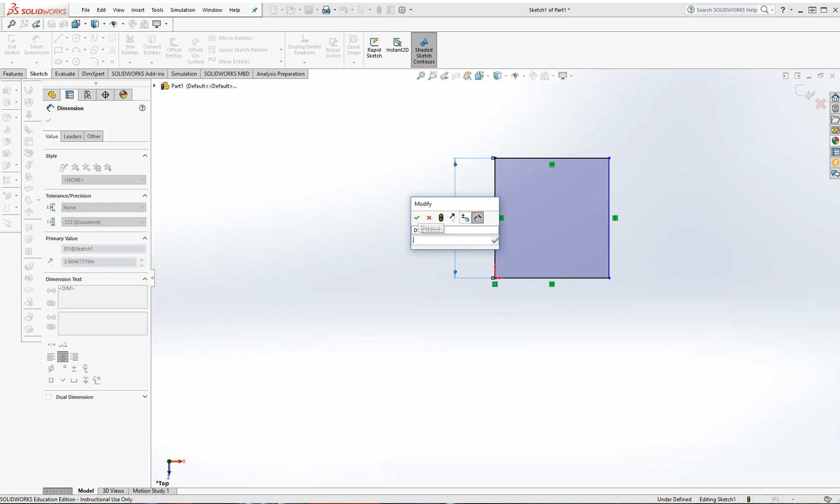And we know the simplest brick, which is a 1x1, is 0.31 by 0.31. If I go to my ISO view, and we also know that they are 0.128 thick.

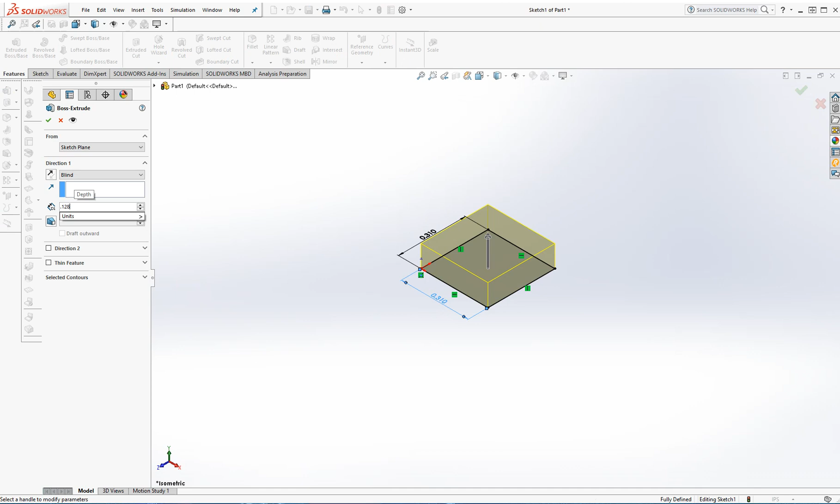This is for the thin Legos. So I go in features, extrude it, 0.128 in the downward direction. Happy check mark.

We'll do a quick save. Save as. I'm just going to throw it on the desktop, but you throw it wherever you want. Okay, so I'm going to call it Lego brick, and then your first and last initial.

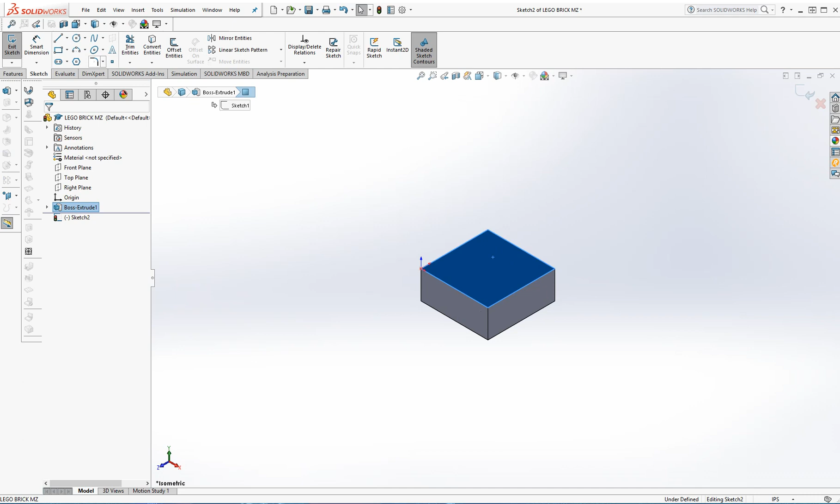Next thing, we need the round extrusion at the top. So we're going to click on that surface. We're going to sketch a circle. Doesn't really matter where, because we're going to dimension it anyways. And let's get to a top view.

And we know that it is 0.193 diameter. And we know that it's centered on a 0.31, so it's 0.31 divided by 2. And then in the other direction, 0.31 divided by 2.

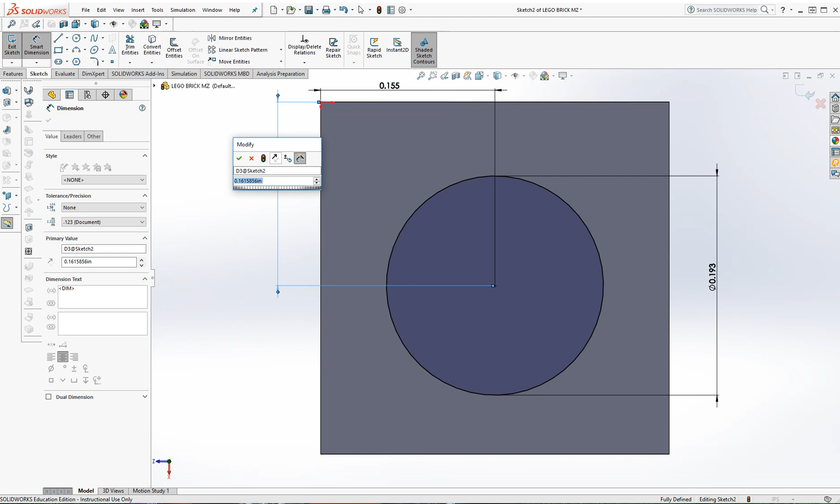Black is beautiful, it's defined. Let's go back to our ISO. And we know it extrudes up 0.084.

Save that. And then the next thing we need to worry about is that there is an undercut of all of these so they can go together.

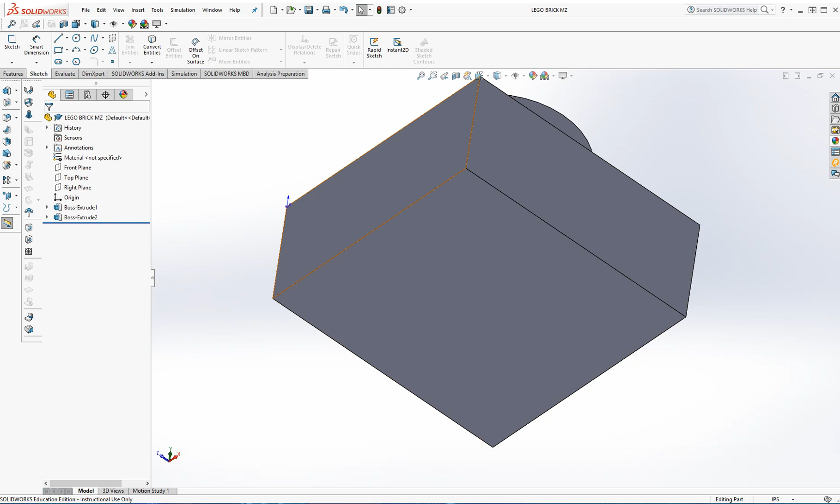So we'll click on that surface. We're going to sketch. We're going to do an offset of 0.06. And we're going to reverse it so it's on the inside. We're going to do an extruded cut.

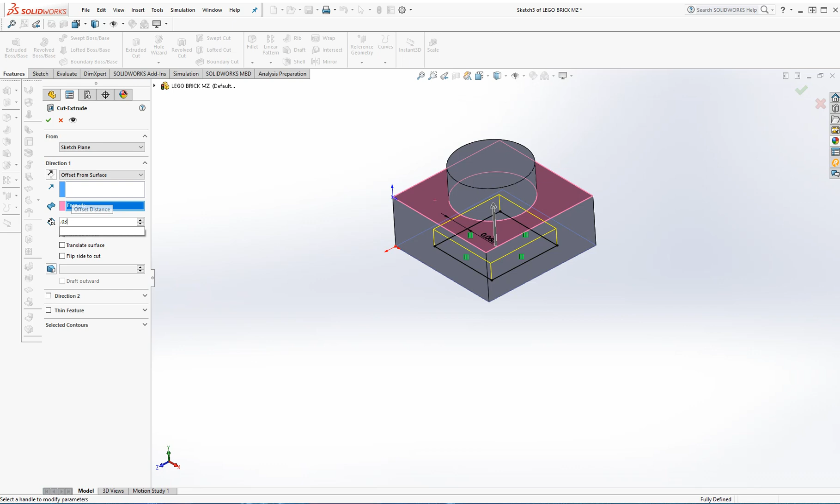We're going to do offset from a surface. So we're going to grab the top surface. And we know that it's offset by 0.038. Okay, save again.

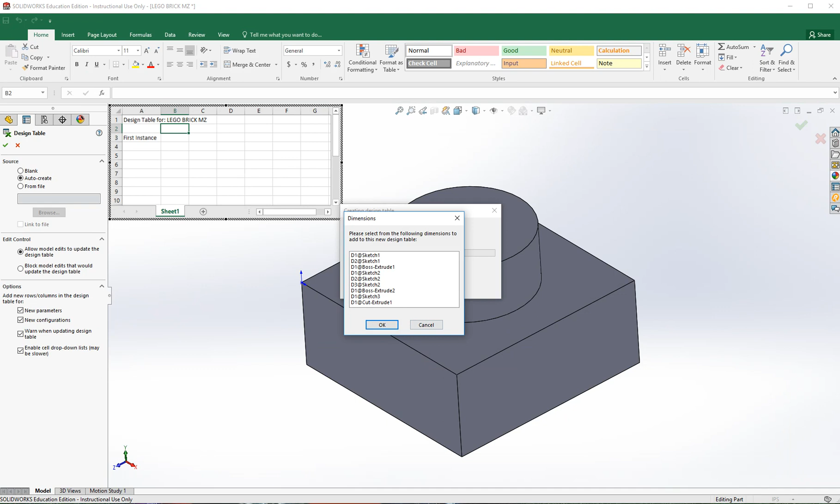Now we have to start getting into configurations. So we're going to go into Insert, Tables, Design Table. Let it stay on Automatic or Auto Create. Happy check mark, it'll do some stuff. It'll tell you it's seen all these different parameters you've already created, and that we're good to go.

With design tables, you see the sort of hash or section view kind of lines on the perimeter. Those are the only way you can grab it and move it around. If you click in the open space of the drawing, it's not going to work.

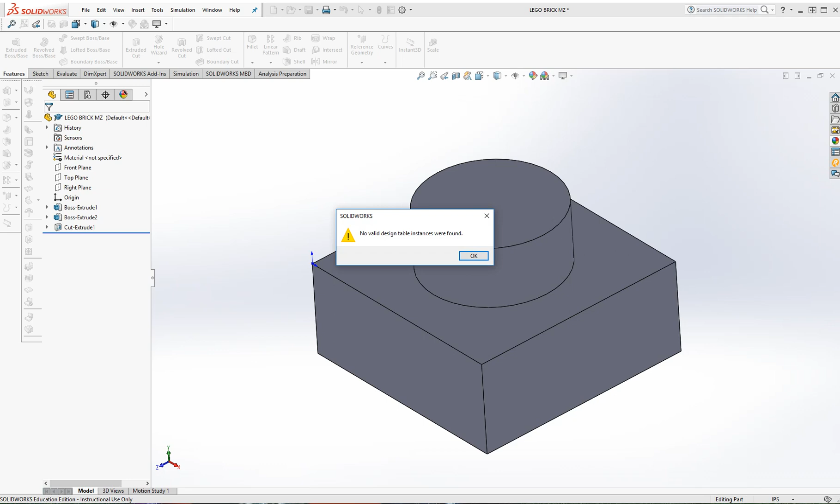But what happens if you click? Well, let's click it. Oh, and it disappears. You don't want it to do that. And it also tells you there's no design tables found because you haven't created anything yet.

Sometimes design tables are a little glitchy, so you may want to go in and turn on Excel. When you're in Excel, just grab a blank workbook and minimize it, as long as it's running. Sometimes it helps the glitchy factor because SolidWorks and Excel are integrated together, so you can use it as a design table.

So if I go up here, configurations, you can see the tables. If I expand that design table, I can edit the table.

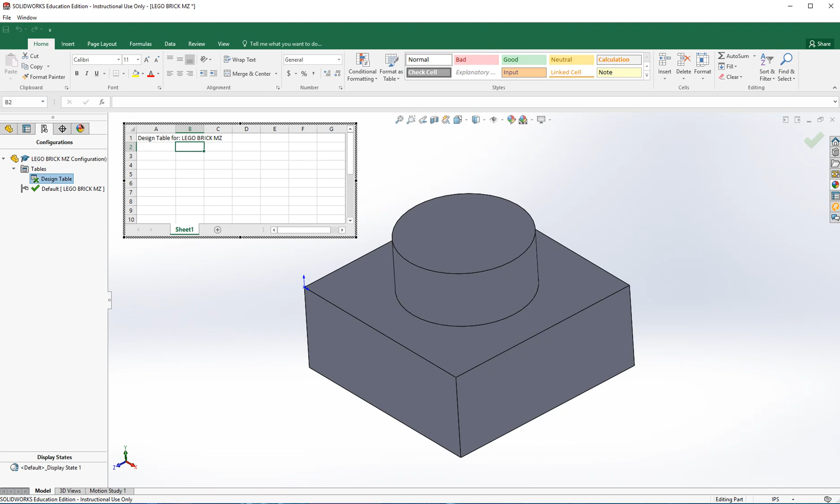All right, it goes automatically to B2, right? And if I go back into my design tree, and I double click the first boss, right? It's going to say state of boss extrude 1, which is the square, is unsuppressed, which means it's always going to be displayed.

All right, you're also going to want to know in that boss extrude, and you got to grab this carefully again and drag it, its width and also its thickness. So we're going to do boss extrude, and over here you can see the thickness came up in blue, so it's going to fill in here. So I double click it. Okay, it's there. Sometimes that comes up, just hit the happy check mark.

And then you're going to want your width and length, or width and length, depends on which way you look at it. So again, you're in D2 now, double click that, and then double click the next one. You see they automatically fill in. And we're going to call this over here, we're going to go 1 by 1, and we're going to call it flat.

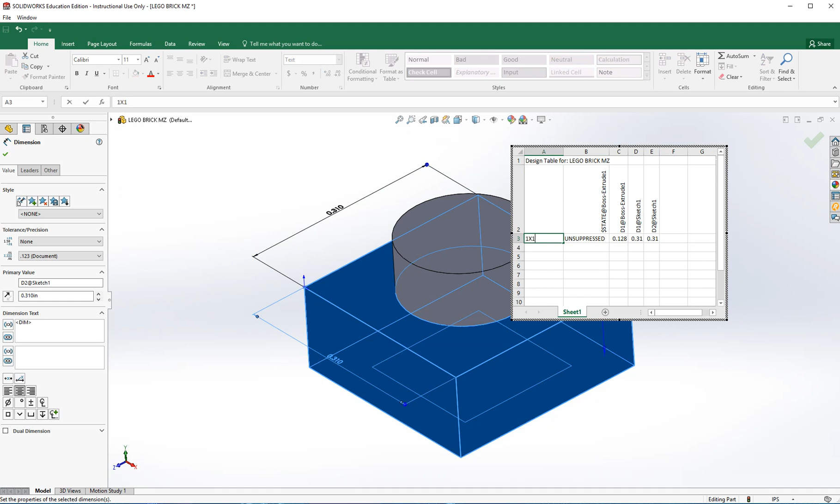And now I'm just going to click off. Okay, it's going to say that it has created a something. All right, doesn't hurt to save it right now.

Go back to configurations, you can see there's a grayed out 1 by 1 flat. Let's double click it, now it's active. Design table, edit the table. Okay, it's going to say some new things came up, like the part number. Okay.

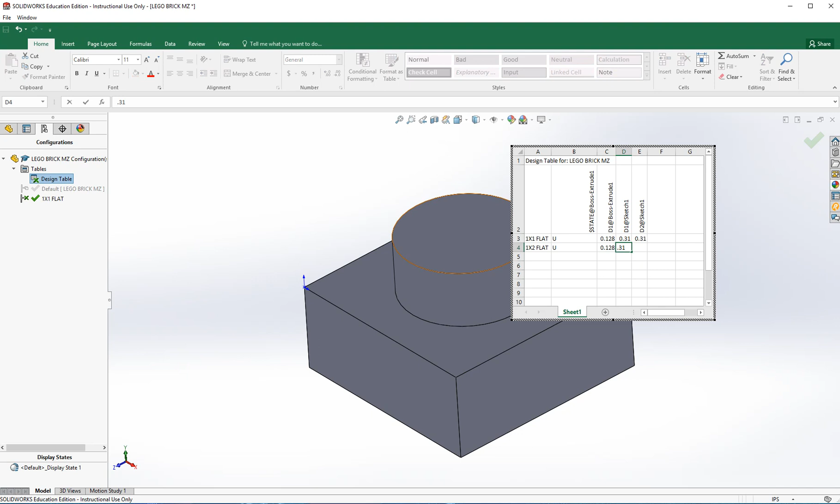And now we're going to do a 1 by 2 flat. So 1 by 2 flat. The extrude is still going to be unsuppressed, your initial boss. Okay, its depth is going to be 0.128. Okay, its direction, well in one direction it's staying the same because it's a 1 by 2. In the other direction it's doubling, it's going to become a 0.62. And if I click off over here, it's going to say a 1 by 2 was created. Quick save, and if I double click on the 1 by 2, you can see it's gone in a direction.

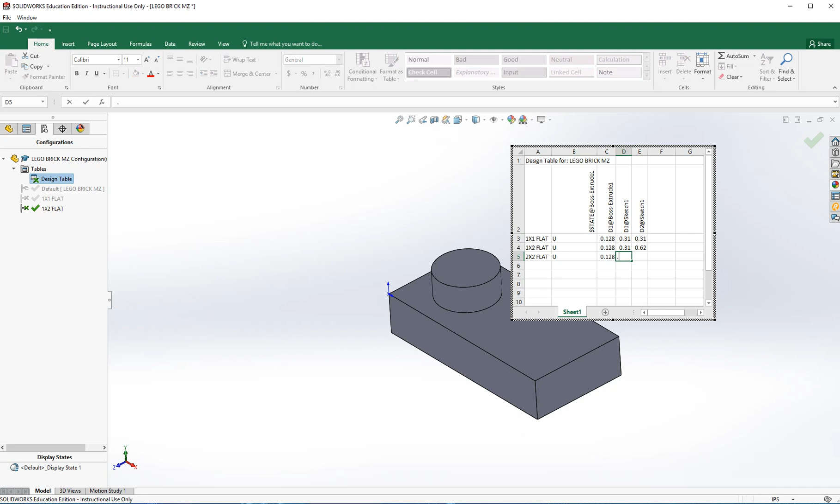Now we need to do a 2 by 2. So we're going to go back in, edit the table, and we're going to go, or a 2 by 2 flat. Okay, again, the boss is unsuppressed because we need it. The thickness has not changed. Okay, but now we know it's 0.62 by 0.62. Click off, it's going to say a 2 by 2 is created. You're going to see it here in your configuration. Quick save, if I double click on it, we've got that.

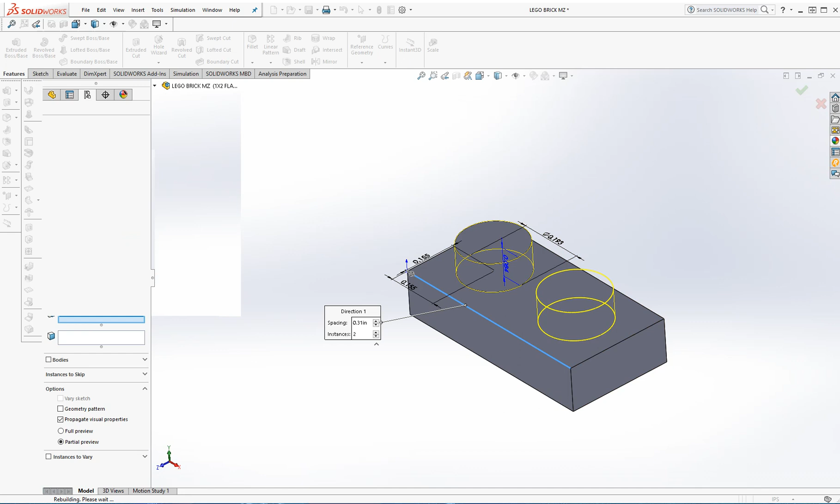So let's go back to the 1 by 2. Here we are, now we want to add some linear patterns. So it's going to say a direction, I'm going to grab this edge. Okay, it's going to ask a distance. Since every brick, starting by the simplest, is 0.31 by 0.31, its distance center to center on the post is 0.31. And then we go on to features, open our design tree, and that's the second one. It's previewed, okay, happy check mark. It's good, okay.

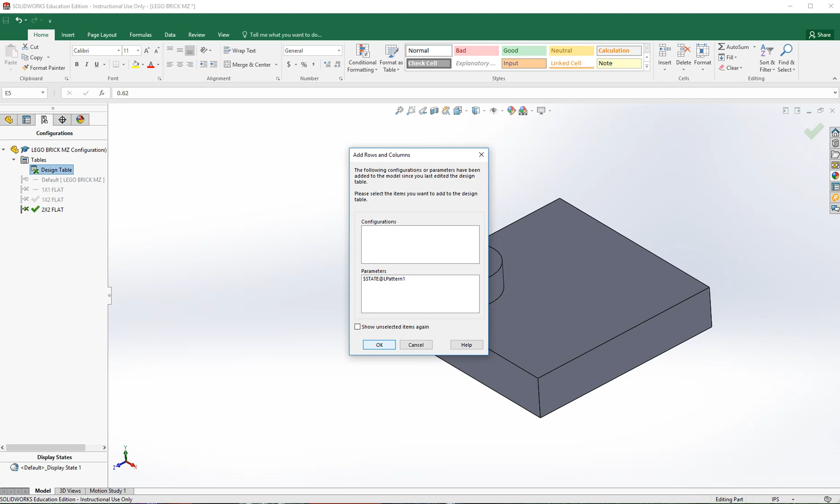Then we're going to double click on the 2 by 2. You see, it disappeared, why? Let's go into design tables, let's edit the table. Okay, it has patterns, either they're on or off. Okay, so we're going to have to use that. And here it is, comes up. So the first pattern we need to incorporate into our design table.

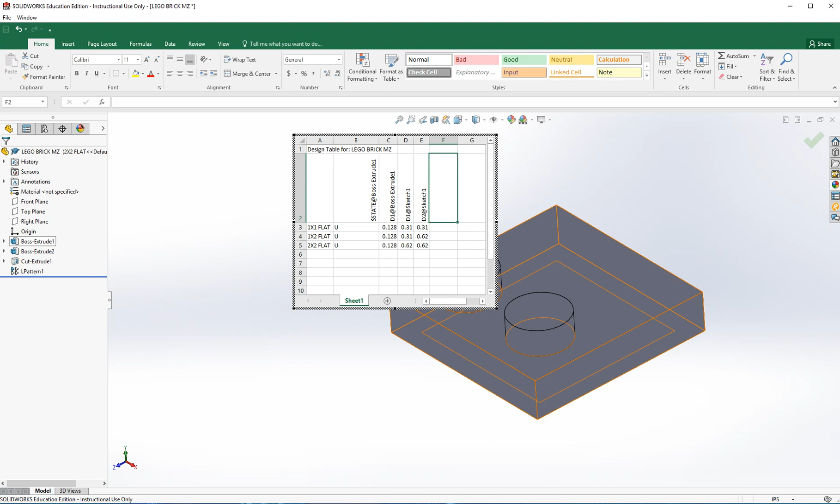So let's go back into here. Okay, and right now it's showing it as... so let's unsuppress it, so it shows the 2. And let's go back into the design table. And back into configuration, so pattern 1 just gives you this direction right now, or possibly the other direction. It depends which sketches you used. So F2, I double click pattern, it's going to say unsuppressed. Okay.

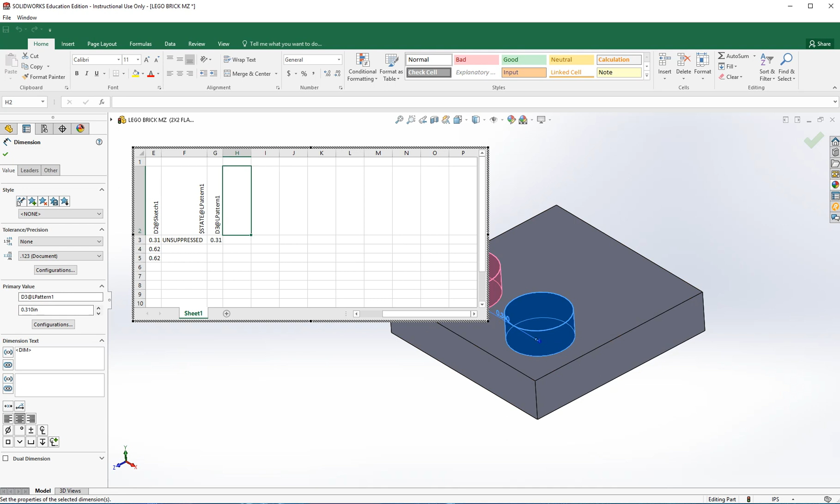And let's just drag this carefully again. And in here you're going to want the dimension, which is 0.31. You can see it comes up. And now you have to grab these corners very carefully, stretch this out, and use the bar at the bottom to move things over. Okay, there is no pattern in the 1x1, so you're going to suppress it.

In a 1x2, there is a pattern, okay, and its distance is 0.31. And we'll just click off. Well, let's just save this quick. And you can see it's a lot of back and forth to get this to work correctly, but you need to take it in slow steps until you get very comfortable with configurations. So if I go back to 1x2 to double check, it'll ask you to rebuild it. Don't worry about that, quick save.

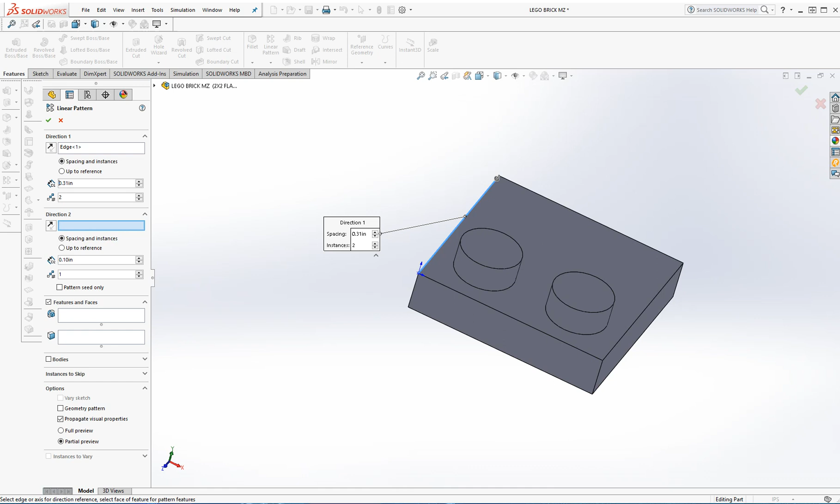1x1 looks good, rebuild again. 1x2 looks good, also that undercut you can see is there. Okay, and then let's go to 2x2. Nothing there yet, so we're going to go back into here. We're going to do another linear pattern. We'll grab this edge, it's going this way now. Still, whatever. And then what do you want to do? And we're going to grab that, not this direction, but the other direction. And a happy check mark, right?

And save that. Go back into my design table. Edit it. Okay, it's found that there's a pattern 2.

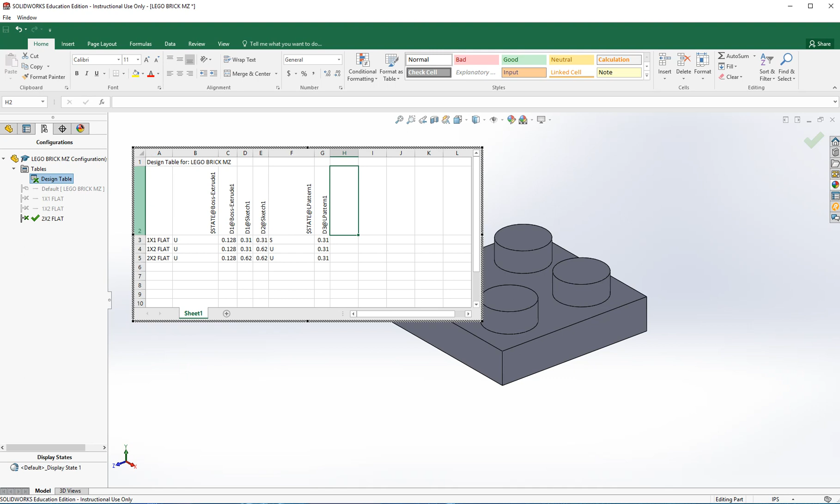And that's the pattern we're going to want. So we're clicked in there already. We're at H2. Go back here. We're going to double click the pattern. All right, and we need to know. I'm going to move this again carefully. Okay, we need that dimension. So we know the dimension we're going in.

And happy check mark. But it is suppressed in 1. It is suppressed in a 1x2. It is unsuppressed in a 2x2. Okay, these numbers, you can put them in there, the 0.31 and a 0.31 again. You can see that they do not change anything because of whether they're suppressed or not suppressed.

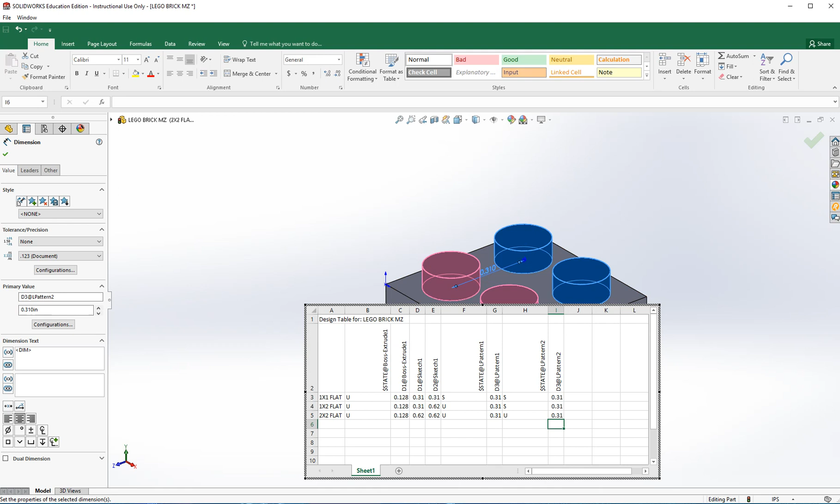So let's click off. Okay, and rebuild. Quick save. And we double check our work. If you do it step by step, it introduces less chances of mistakes.

So double click 1. All right, double click 2. Double click 2x2. And again, if you look, the undercut is there.

So another thing that's really nice, we've named these things, but they're kind of crazy names. If I go into here, all right, if I click and click again, it lets me name what the extrude is. So we're going to call it the box.

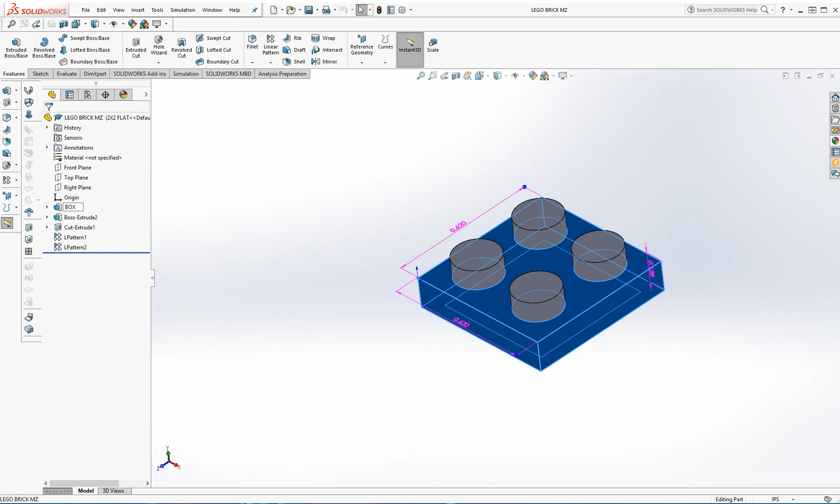Sounds good. All right. If I go in here, I can go sketch 1. If I do that again, click, I can say this is my length by width.

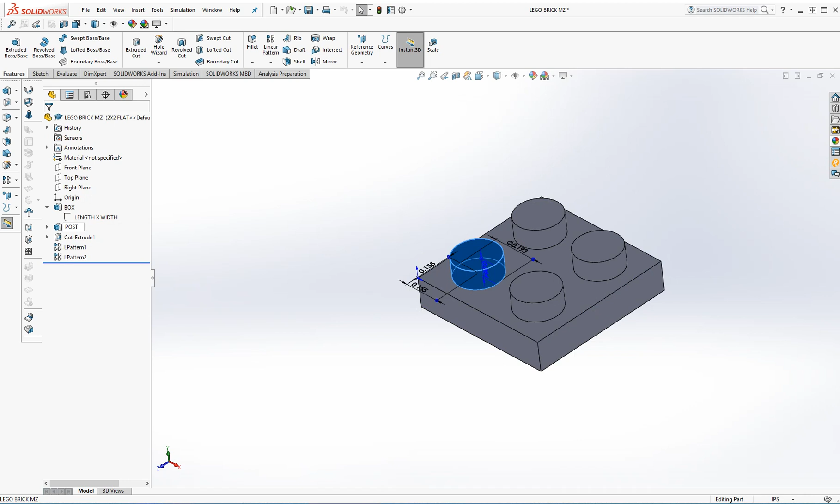Okay. Boss extrude 2, we can, right, and that's just the post. Really don't need to do anything about the dimension, naming it, because it doesn't matter. The extrude cut, all right, we'll just call that the snap feature.

Okay. Quick save. And if I go into my configurations, right, we know all this stuff is working. Let's go into our design table and edit it. It's going to update. It's still updating.

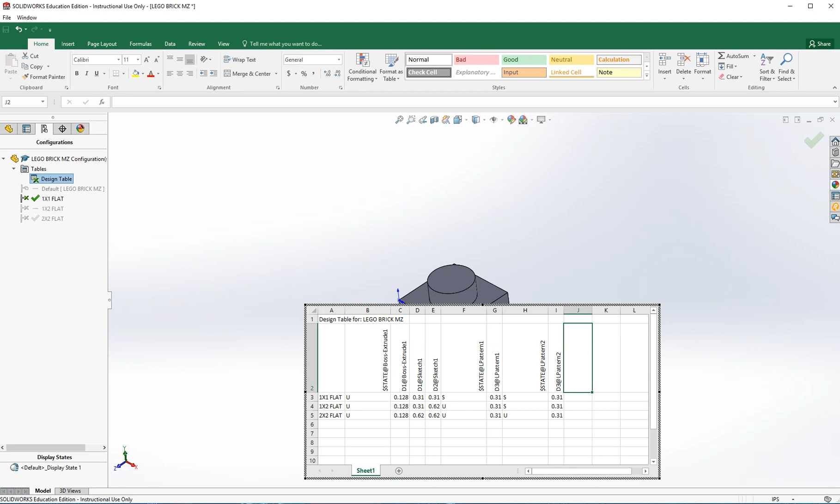Okay, looks good. I'm going to just shut it off or let it cycle again. Save this. Ooh, this is interesting. It did not do what I expected.

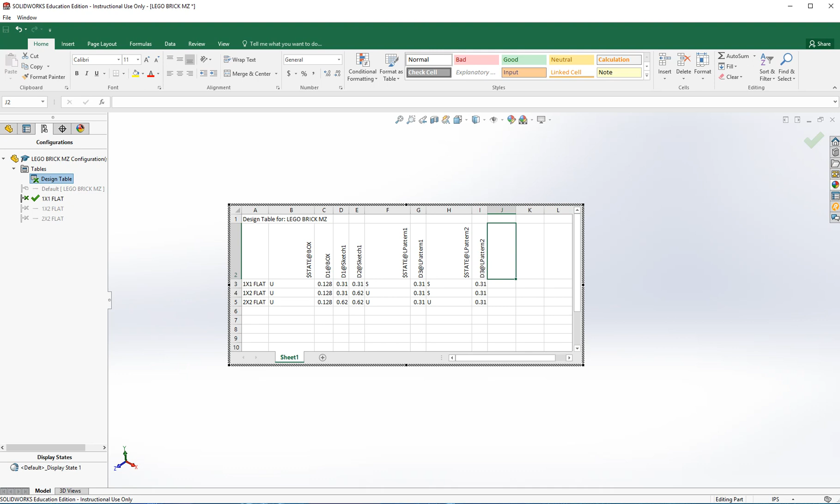I'm going to call this box again. It should have, and I'm just going to do one quickly. It should have let me rename it. And if I go into here and edit the table, there we go. You can see now the name in C2 has become D dimension 1 at box.

Acting a little bit wacky, and sometimes because it's going back and forth between Excel, that's the importance of having it on in the background to reduce what I call the glitch factor.

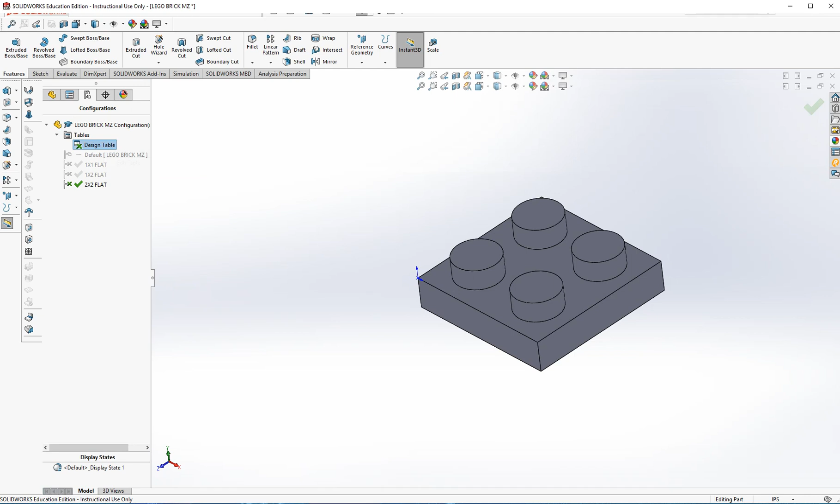Let's edit the table again, see what it looks like, see if it's renamed things. There we go. So the state of the box, it's unsuppressed. The dimension of the box, which is its thickness. Its length and width, you can see, is in there, those sketches. State of pattern 1 is one direction, right? And its distance, state of pattern 2, and its direction and its distance. Okay.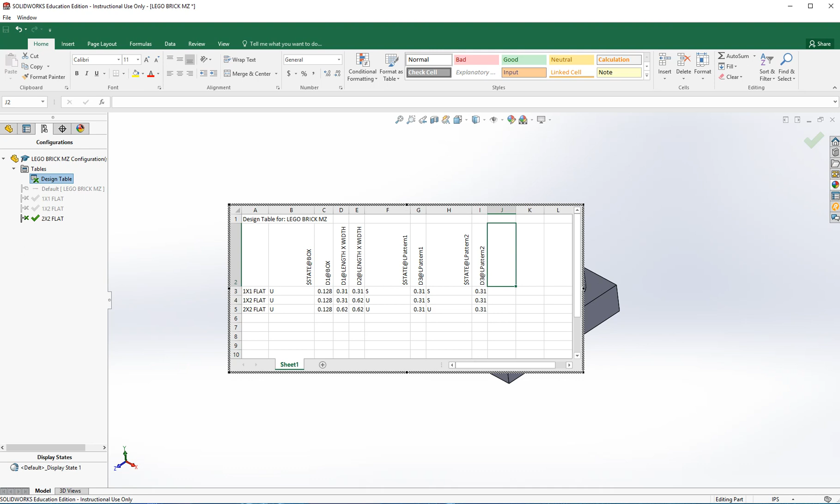All right, so let's go here, here, here. Let's look at our configurations, box, post, snap feature, everything's there. So that's the basic configurations. And that's how you create design tables.

As you expand things, you should do the base first, however big you're getting it, and then add your pattern of rows, okay, and so on. And it's like you're going to suppress possibly this pattern and this pattern, or maybe this one stays on, but now you're going to be going in this direction. It'll be a next thing will be a 2x3 long, 2x4, and so on. And reviewing this video will help you figure it out from one to another.